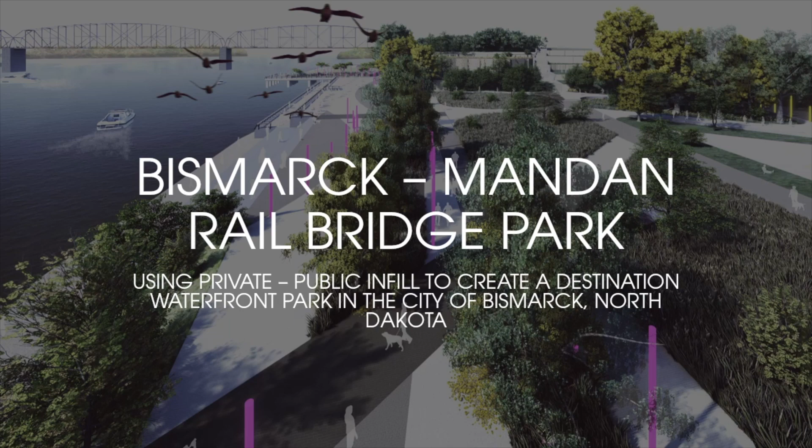Hello everyone, my name is Austin Schmidt and I'm one of the 5th years in Professor Anna Maria Visla's Advisee section, and this is my thesis project titled The Bismarck Mandan Rail Bridge Park, using private-public infill to create a destination waterfront park in the city of Bismarck, North Dakota.

The study is really a continuation of my research in one of our past program courses, where I began an interest in a Rails to Trails project, which is the conversion of abandoned rail lines into pedestrian and bicycle trails. At the same time of this initial research, the nonprofit group Friends of the Rail Bridge were just beginning their fight to preserve the rail bridge with an interest in transforming the bridge into a Rails to Trails project after BNSF announced plans to tear it down.

Originally assisting in the railroad's expansion westward, the rail bridge connects the capital city to its sister city of Mandan and has become a defining landmark to both cities. Still used as an active rail line today, the Bismarck Rail Bridge is similar to that of the Brooklyn Bridge in the sense that each respective city has turned its back on its waterfront with this iconic structure in the background. However, the Bismarck Rail Bridge predates the Brooklyn Bridge.

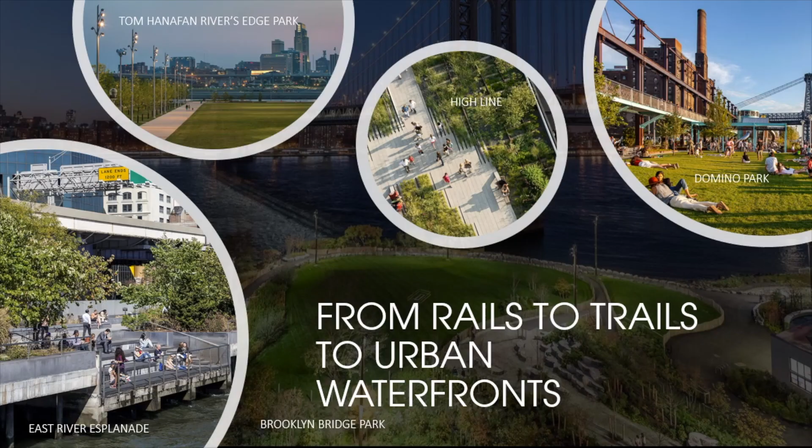After spending some time working on the feasibility study with Professor Dominic Fisher, my research and interest slightly shifted from a Rails to Trails project, but rather towards an urban waterfront. Using my initial Rails to Trails data, I was able to move forward and apply some of the research into my new findings in regards to urban waterfronts.

I was able to determine that many Rails to Trails projects are funded through partnerships, allowing for more than one entity to split responsibilities and costs while beginning their transformation. As I was looking into successful urban waterfronts, it became apparent that these partnerships are not so rare, and many waterfronts utilize them as well.

Starting this past fall semester, I began collecting data and information on 4 urban waterfront parks. It was determined that Brooklyn Bridge Park would be a guiding example as I continue my research and design proposal. The last 3 parks that I followed and collected data from were Domino Park, also in Brooklyn, the East River Esplanade in New York City, and Tom Hanafan River's Edge Park, which is also on the Missouri River, but located in Council Bluffs, Iowa.

Of the 4 chosen parks, I was able to identify 6 programming elements that assisted in each park's success and create a perfect recipe for the ideal waterfront park. After calculating the total area for each park and its programming elements, I placed this data into a matrix table where I began to analyze their similarities and differences.

When it came time to identifying my thesis site and what should be included within it, I was able to reverse the matrix table findings and use the same methods to determine how much space should be allocated to each of these 6 program elements within my own site.

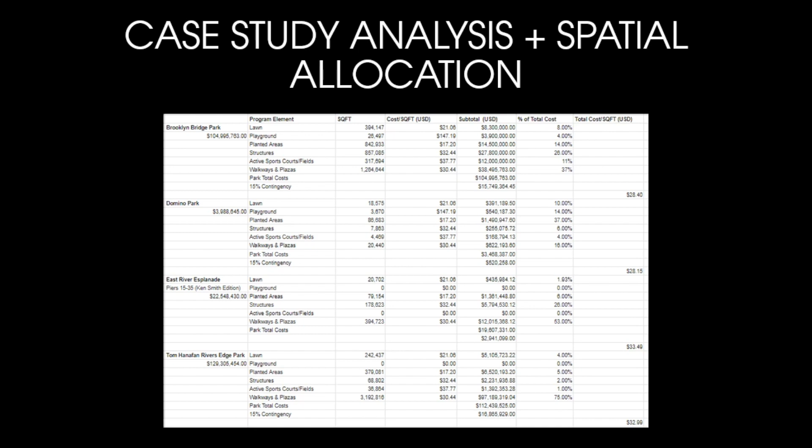As the Missouri River spans through much of the Midwest, it has helped to orient many settlements from the Mandan and Hidatsa tribes to the current U.S. cities that fall along its shorelines today. Bismarck being one of those cities, the river has become a local destination for the area. However, because of its lack of public programming and accessibility, the river has become distant.

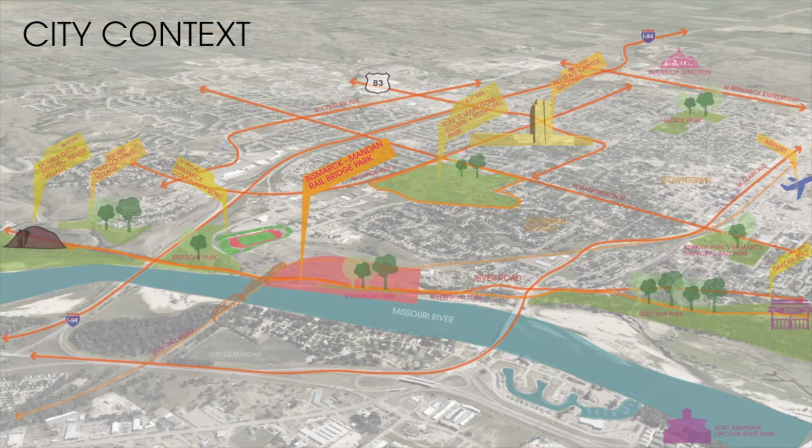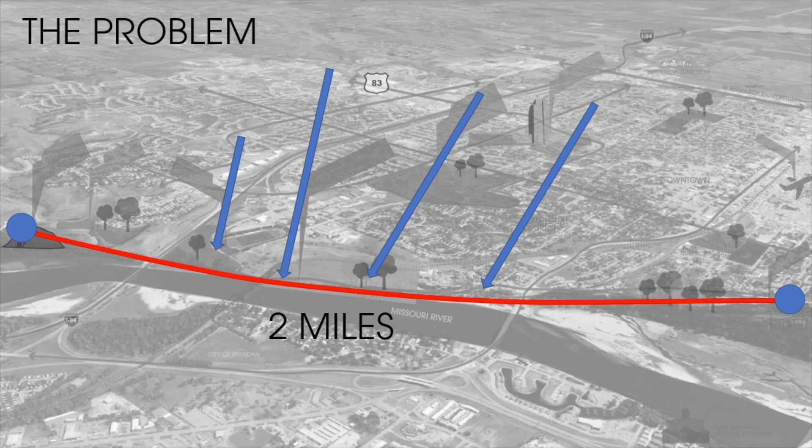Looking at the river as a whole in comparison to the city, the river's disconnection can almost be traced down to the fact that some of its only public access points are 2 miles apart and formed by arterial roadways. Ironically, one of those roadways, the community's favorite called River Road Drive, because of its vantage points of the water and surrounding hillsides, actually bisects the city from its shorelines of the river, creating a pedestrian disconnect.

Despite its few access points, the river holds a strong sense of place to many in the community. Primarily for its recreational usage in the warmer months, it is not uncommon to see the sandbars lined with pontoons forming parties in the middle of the river, fishing near the shoreline, or tours happening from inside the Lewis and Clark riverboat. With the river being a popular hangout, it is not uncommon for the water to resemble that of a highway, in the sense that traffic goes up and down as boats stick to each respective side of its shorelines.

Aside from the river and being the state capital of North Dakota, the city is home to many year-round festivals and outdoor activities, making it a small urban city on the rise. Already strong in open space for sports and recreation, an opportunity is provided to design and reconnect the public's relationship to the water's edge. This study focused on the preservation of the Bismarck Mandan Rail Bridge and the surrounding 52 acres, looking to use the bridge's transformation as a catalyst for a waterfront park in the capital city.

Using the typology of urban waterfront parks, I chose to do my thesis in the city of Bismarck because of its lack of connection to the river, the opportunity to design for year-round programming, and to build up the idea to create a regional destination within the upper Midwest.

With the conversation already in place to transform the bridge into a Rails to Trails project, my design focus was already drawn to the remaining open space, which had become derelict with overgrown vegetation, all while being split into two pieces because of the BNSF-owned railroad right-of-way.

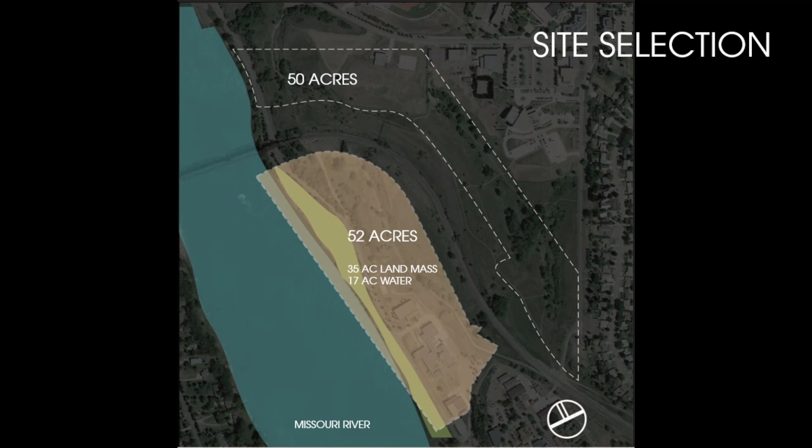Before beginning the design process, it was noted that the site's large elevation changes, variable water levels, and its location within the city would provide some of the greatest challenges as well as create major design opportunities.

Surrounding the site, much of the landscape is lined with both native and invasive plant species such as Russian olive, green ash, eastern cottonwoods, and a mixture of native grasses and forbs.

The steep cut banks of the river change each season, partially due to the spring flooding coming from the mountains in Montana at the river's source. With the river's strong current, an abundance of soft sand usually gets pushed along the shoreline, forming informal beaches that become overused and disappear by the end of the season.

Breaking down the existing conditions even further, site circulation and elevation changes became the major constraints to the site. Most of the existing circulation runs along the outside edges of the site, creating a lack of accessibility, as well as most of the site being deemed difficult but not impossible to develop.

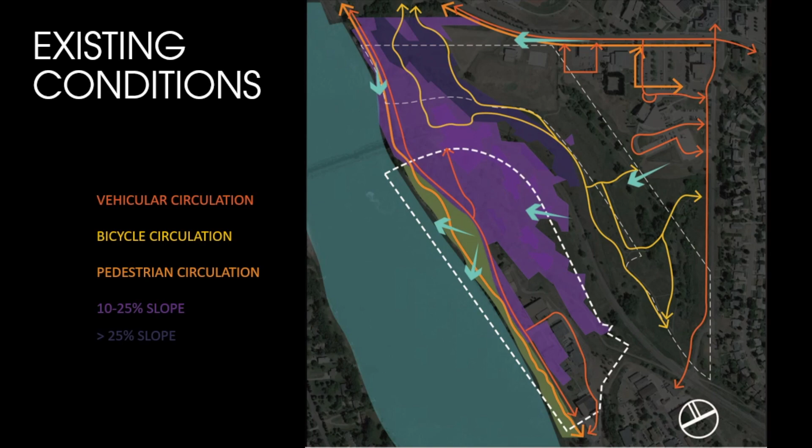Using the CNC machine, I was able to create a topographic model that I used to explore and highlight the site's slope and its great differences throughout the site.

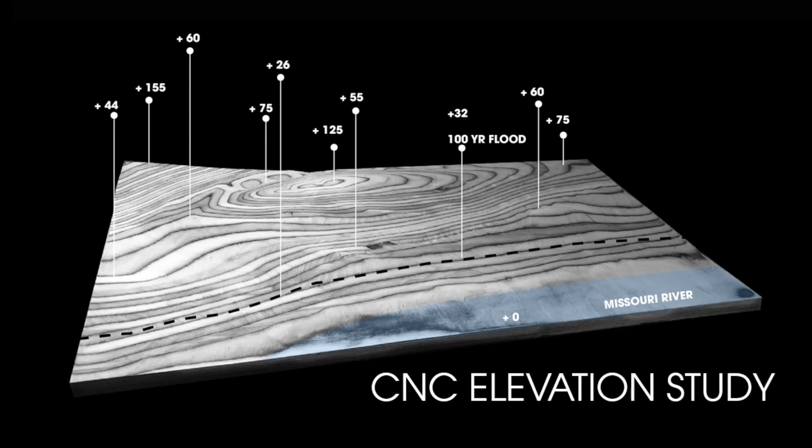You can see that from the river's edge to the top of the hillside and where the railroad runs through the hillside, a difference of about 60 plus feet can be highlighted, which in return has created major erosion control issues.

After completing the pre-design portions, including inventory analysis early throughout the semester, I was able to return to my question and further investigate it as I began the schematic phase next.

Can private-public infill create a destination waterfront park in the city of Bismarck, North Dakota?

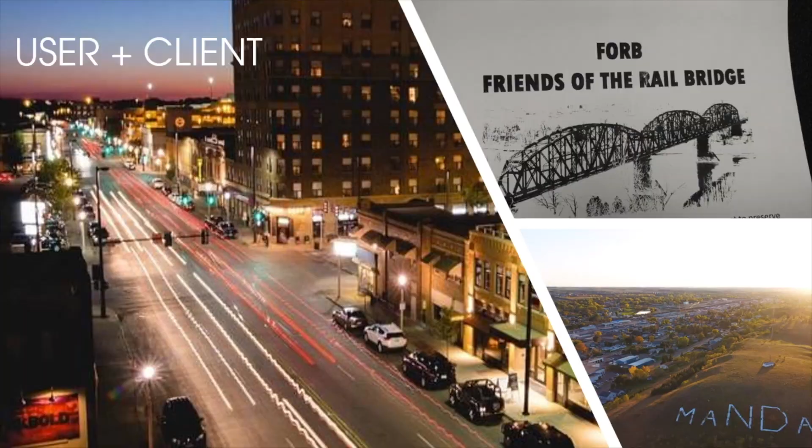Although I believe that the chosen site and the park can become a cultural destination through much of the Midwest, I think that residents of Bismarck, Mandan, and the surrounding areas will make up the primary users of the site. Regarding the initial clients for this project, FORB would be the primary stakeholders with their grassroots movement to save the bridge.

However, both municipalities of Bismarck and Mandan would make up secondary stakeholders. In the next slide, I will further explain how stakeholder relationships would work out.

Using the analytical matrix performed during the precedent portions of this study, performance criteria and project goals were justified by accessibility, preservation of the bridge and the waterfront's character, and economic and ecological vitality of the site.

As I looked to begin the schematic process, I chose to establish pedestrian and bicycle circulation as the primary modes of accessibility and transportation throughout the site. This would remove the focus on the already underutilized surface parking lots and provide an opportunity to experience the site at the human scale.

In the effort to complement the bridge and its surroundings, a regional plant palette and materials palette were chosen to assist in the performance of its year-round programming.

Lastly, the final goal was to establish a private-public partnership among the Bismarck and Mandan Parks and Recreation with private developers. This would entail Parks and Recreation covering the initial land purchase before handing it over to the developers, in which a perpetual agreement would be created in the interest that a portion of the sales on site would go towards funding the park and bridge's maintenance in the future.

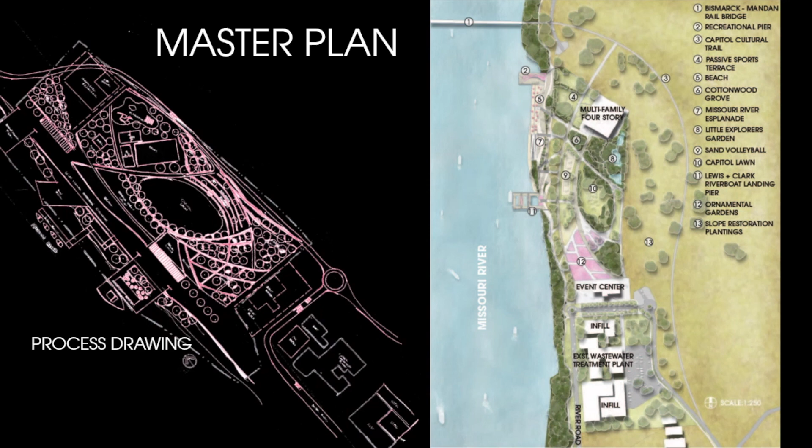This allowed for some big design moves, the first being rerouting River Road away from the water's edge, but rather through a tunnel in the steepest portion of the hillside. This created uninterrupted pedestrian mobility from the water's edges all the way to the site's eastern walls. Rerouting River Road also created the opportunity to develop 2 new entrances within the waterfront: one a series of terrace stairways up to the newly converted rail bridge, and the other a new road formed by joining a previously private road into an existing public one.

Starting at the north half of the site, we can take a closer look at how guests would travel to and from the rail bridge into the site. A grouping of planted terraces along the proposed 4-story multifamily development assists in gaining control of the site's erosion issues. Through the rebranding of the existing riverfront trail into the Missouri River Esplanade, the interwinding routes formed with paver patterns create the site's major corridors. From the Esplanade, guests are able to achieve access to the programming that matches that of the research case studies.

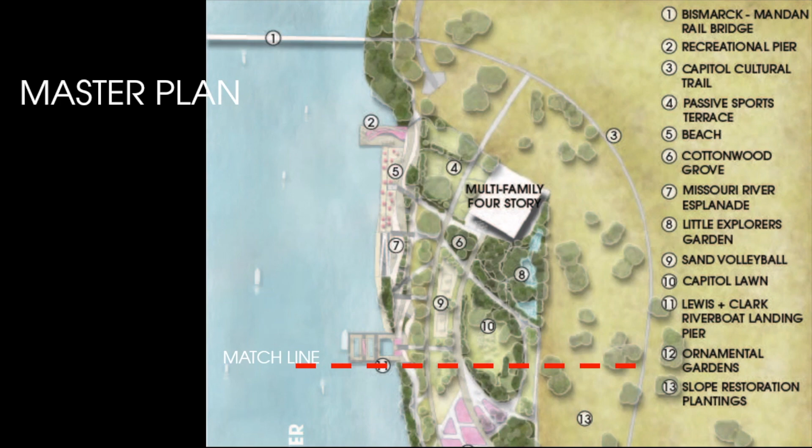With the multifamily development being one of the private developments in the perpetual agreement, the remainder of the proposed development lines the southern edge of the site. Choosing to keep the existing wastewater treatment plant, small infill projects can make more efficient use of what's already existing.

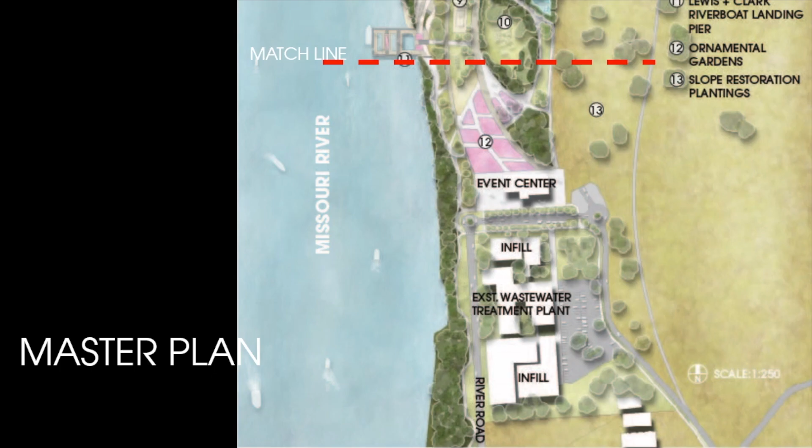Already adapted to the local climate, clusters of native and regional plants were chosen to achieve both performance and environmental goals. With many of these plants already existing naturally along the river, the idea for the site was to bring those same plant species into the site, but provide order and structure so that they can become focal assets within each garden.

Channeling the existing large thickets of redosier dogwoods and pollinator plantings assist in creating vegetative screens that allow for a sense of security and mystery on each side. River birch, coneflowers, bluestem grasses, and yarrow line the Esplanade's recessed stormwater gardens, while combinations of alliums, tulips, daffodils, and bur oak create seasonal interest and consistency.

When it came down to choosing materials for the site, I wanted to select products that would enhance the waterfront while preserving the past. Corten steel planters along the piers complement the bridge's aging trusses with their rust tones, while clay pavers run along the major pathways of the site.

Colors of flint, sandstone, and buff bring the warmness of the sand along the shoreline up to the promenade as they form undulating pathways running north and south. These same colors are represented on the fabric-formed concrete retaining walls that channel the white and coal-colored cut banks of the river.

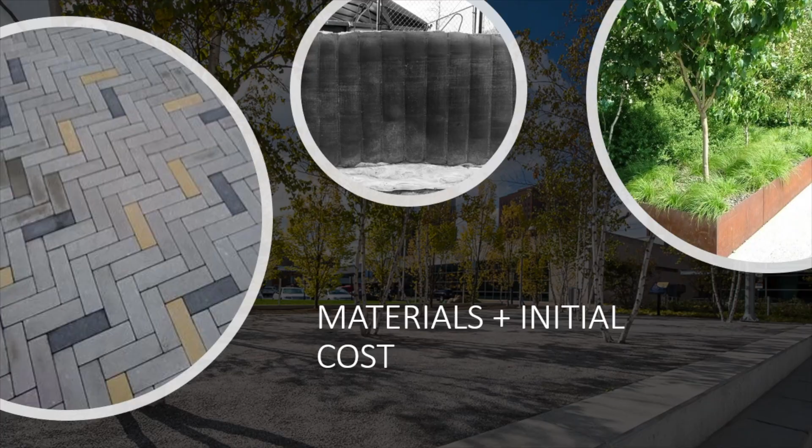By looking back at the case study matrix, I was able to use those same figures to create a cost opinion specific to those 6 design elements. I was able to utilize the feasibility study performed by the NDSU Landscape Architecture Department on the rail bridge to create a total cost estimate for the park, which can be used by the major stakeholders to further define the scope of work.

It is important to note that success can be reliant on various degrees of measure, as well as the creation of an opinionated degree on what constitutes success regarding the Bismarck Mandan Rail Bridge Park. Despite the design not meeting its spatial requirements, the site could be considered a success in terms of new access points created, the riverfront's character preserved along with the bridges, and turning what was once a steep hillside into a now ADA accessible, year-round friendly atmosphere that promoted economic and environmental vitality.

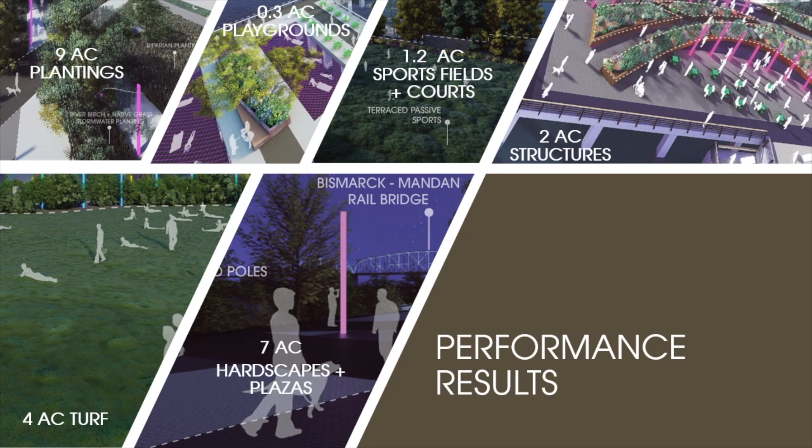Beginning at the site's southern edge, we can take a closer look at the design starting with the reroute of River Road. Neon lights illuminate the short trip through the hillside, creating visual interest that draws attention both in and out of the tunnel. At 54 feet wide, the tunnel allocates a north and southbound traffic lane with 12-foot emergency lanes going each respective direction before popping out on the north half.

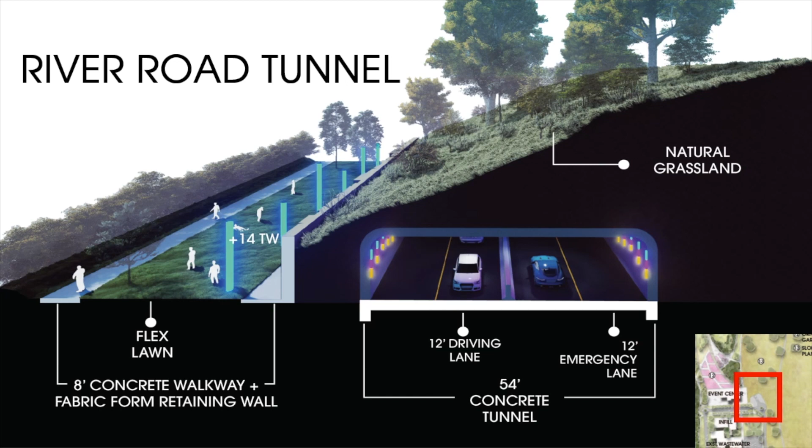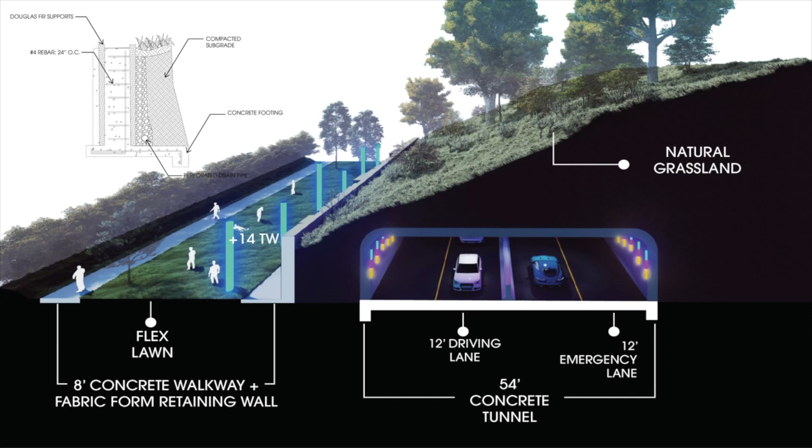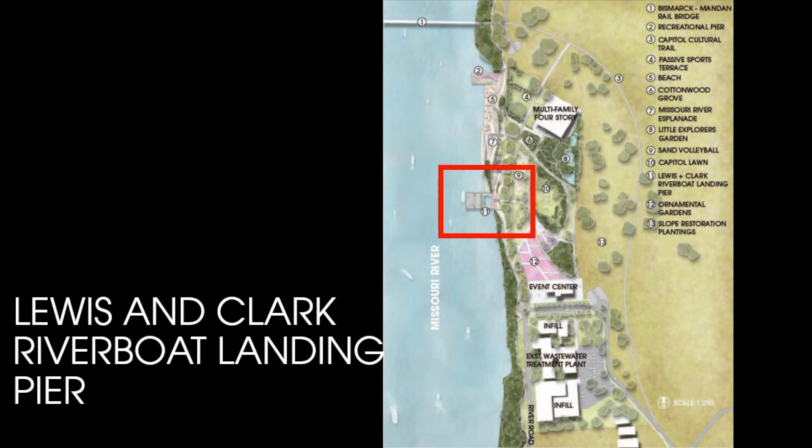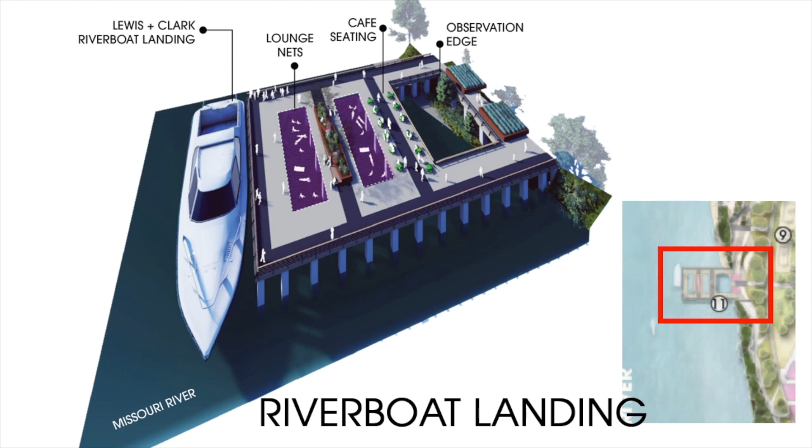From the River Road tunnel, we can make our way through the ornamental gardens towards the site's southern pier. Providing an improved home to the Lewis and Clark riverboat, the pier allows better access to the river, as the Lewis and Clark riverboat landing has one focus only: to provide the physical space and continuation of the esplanade to extend above the water.

Creating a southernmost anchor to the site, the pier is home to lounging nets, an observation edge, and room for dining high above the water.

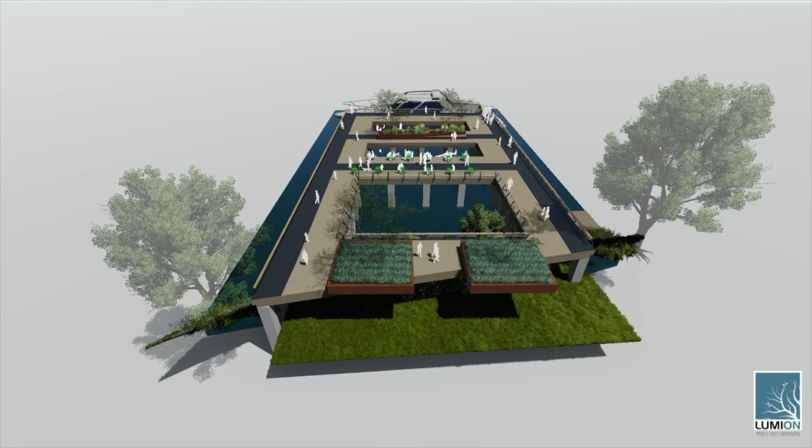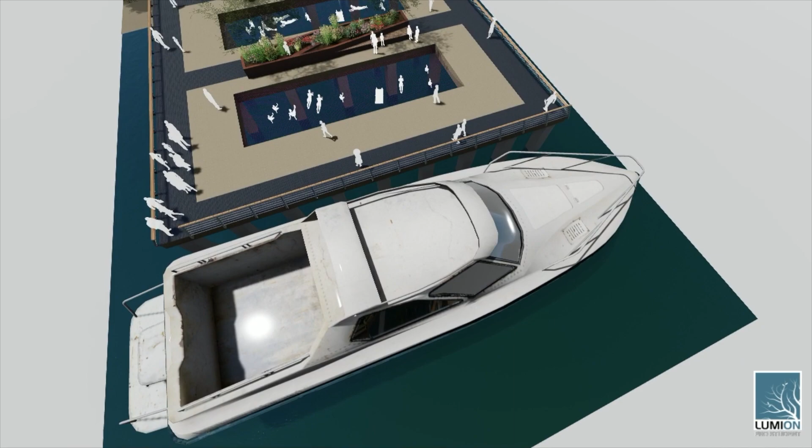In a better effort to assist the public in gaining access to the water, the Lewis and Clark riverboat landing has a premier feature of the nets, which allow guests to achieve a closer feeling high above the current river flow.

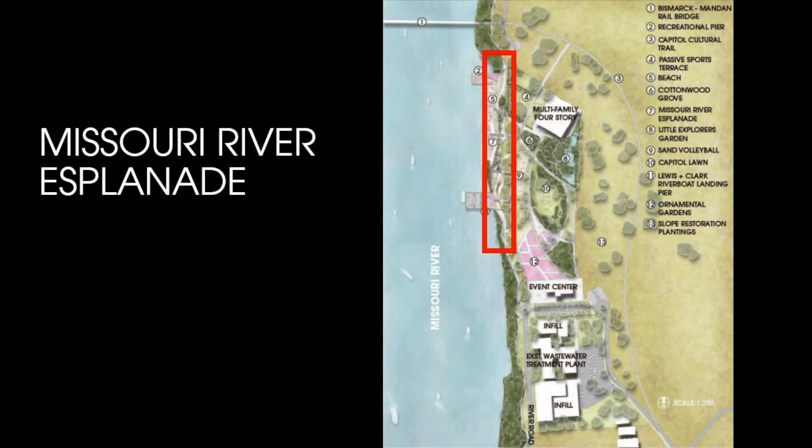From the first pier, we can begin to span north through the primary access corridor, where we get a closer look at the esplanade materials and the supplementary gardens.

Prairie grasses like big and little bluestem and prairie dropseed, along with the natural riparian edges of the waterfront, assist in soil erosion control, improve and protect water quality as it runs towards the river, and provide natural plant diversity.

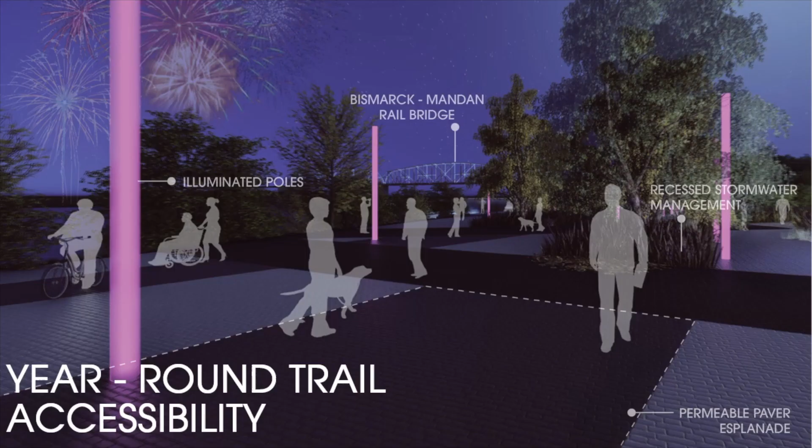Here we can see a better representation of the warm tones on the esplanade, which provides the opportunity for year-round access at a smooth and level surface. Inspired by the large masses of the eastern cottonwood along the river's shoreline, illuminated poles create a staggering focal cue as guests meander throughout the site.

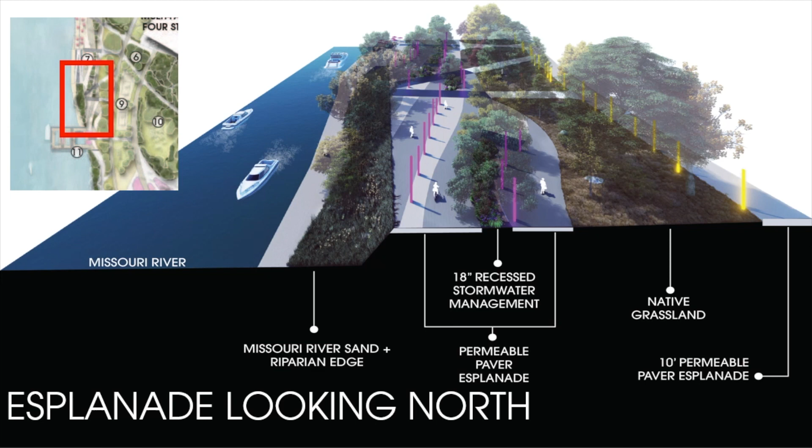Continuing north, we can look and see the site's strong linear patterns along the esplanade in comparison to the river running parallel against the riparian edge. This section also provides a better look at the recessed stormwater planters and their inverse relationship with the permeable pavers along the esplanade.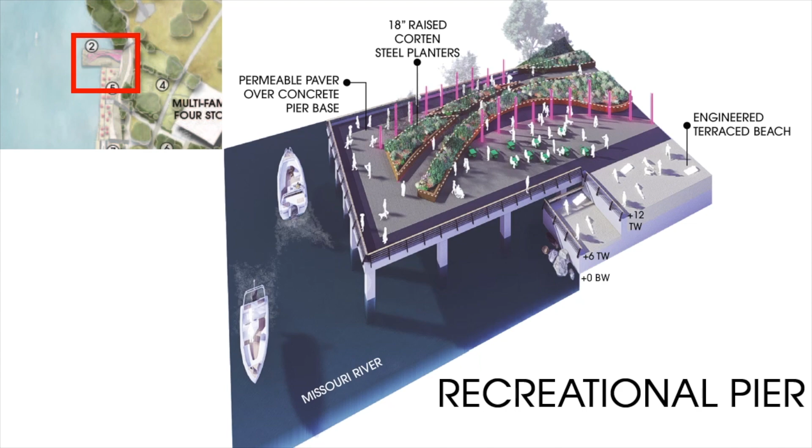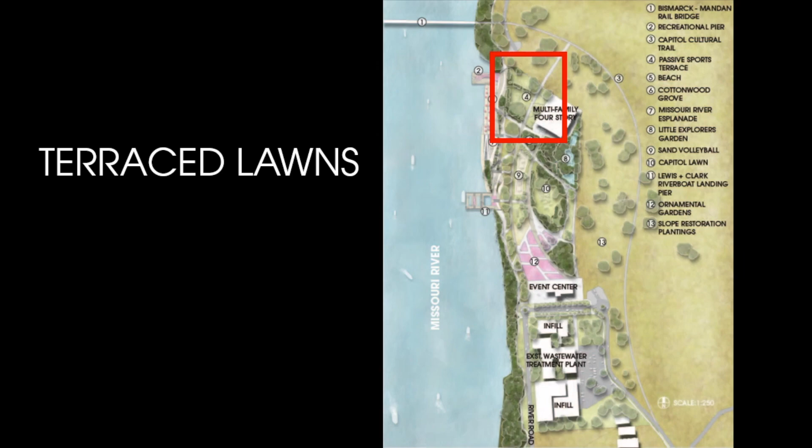Adjacent to the recreational pier, we can take a look at the terraced lawns next. Previously unusable due to its steep hillside, the terraced lawns now provide use and purpose for passive sports play, as well as the base to the corridor to the rail bridge trail.

Taking a closer look at the esplanade from the terraced lawns, this is the first thing people see as they come down from the rail bridge trail, highlighting which direction they should head in.

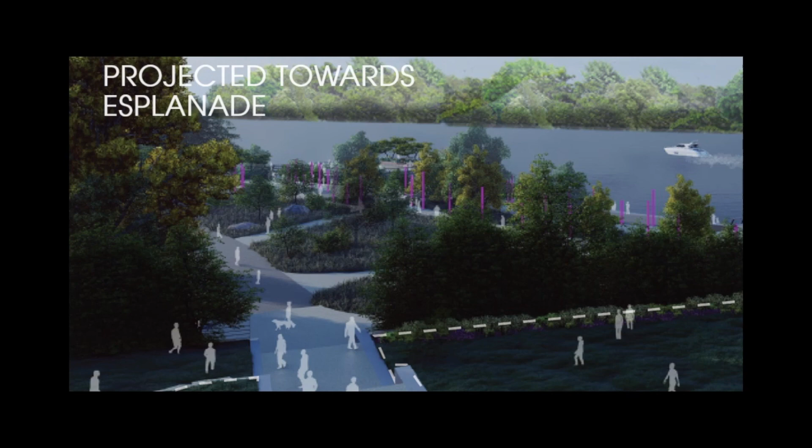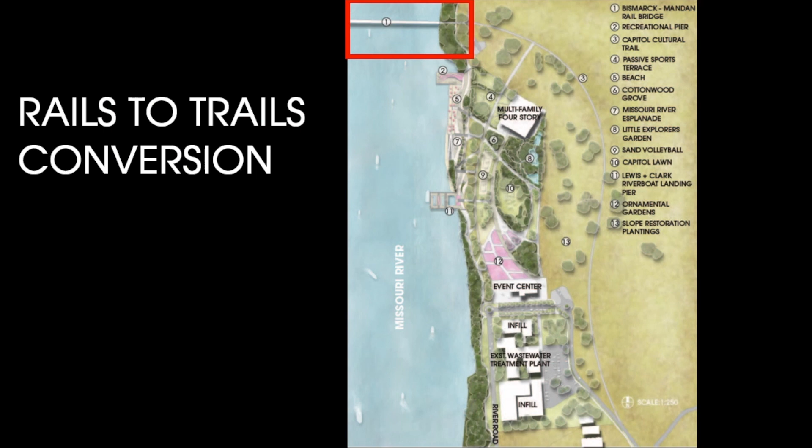The last major project element we're going to take a look at is the rail bridge. Through the conversion of the rail bridge into a pedestrian trail, the illuminated trusses can be seen from neighboring roadways on both sides of the river, as well as give a unique vantage point back to the park. By transforming the rail bridge into a public pathway, it can become a catalyst that sparks the change needed by the Bismarck riverfront and highlight the opportunities at hand.